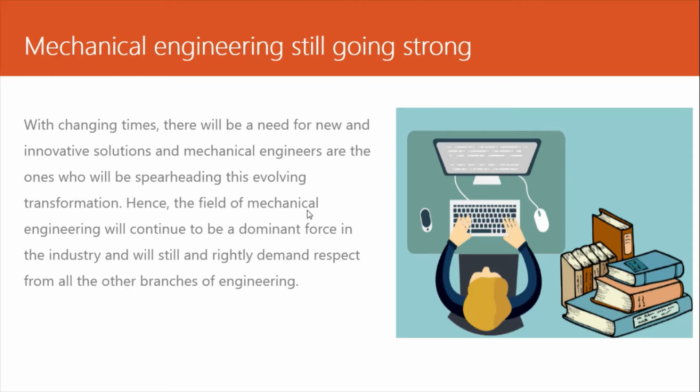Like if software is from civil industry, the developers of that software will largely be from civil industry, because to develop these softwares, fundamental engineering knowledge is required, and that fundamental is had only by engineers from that particular branch. So it is not that software engineering or computer science is good and mechanical is lagging - it's always good, but mechanical engineering is not lagging. It is still strong and it will be strong. It is a dominant stream in engineering.

So what are the things which can be expected from future mechanical engineers? These are mainly a few promising areas for the future. I have listed 7 segments from mechanical engineering where demand will be higher for mechanical engineers in these sectors.

So first is electric vehicles. Obviously, in the world, momentum is gained by electrical vehicles. The whole world, developed countries like European countries or US, have already gained momentum on electric vehicles. Countries like ours are still in developing segment, gaining momentum at a slow pace, but definitely there will be huge demand in electrical vehicles in future because government has changed the policies.

It is incentivized by the government. There are a lot of subsidies on electric vehicles because government also wants to minimize dependency on diesel or petrol, since ultimately it is going to save money. So electric vehicles are in demand currently, and obviously there will be huge demand for them. Whatever technologies related to electric vehicles will be in demand - design, manufacturing, or interdisciplinary skills.

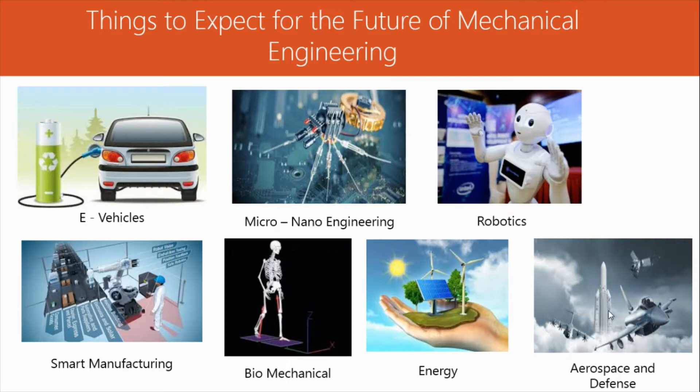So I am going to discuss this from the upcoming slides. I have discussed which areas will have demand for mechanical engineers. Now, where do mechanical engineers actually stand in these sectors? I have broadly mentioned three sectors.

One is CAD and CAE - CAD means computer aided design and CAE means computer aided engineering. CAD CAE is basically a research and development related profile. Then comes manufacturing, the second skill set or area. If you go to produce anything, manufacturing technology will be required.

There are a lot of softwares related to manufacturing. There will be some design of manufacturing processes - this kind of skill will be required, along with Six Sigma or some cost-saving and time-saving techniques required in the manufacturing field.

And lastly, most of the time I like startups. So mechanical engineers can think of starting an entrepreneurship journey in these sectors or any other sectors. Apart from these core mechanical sectors, I recommend mechanical engineers also go through interdisciplinary skills.

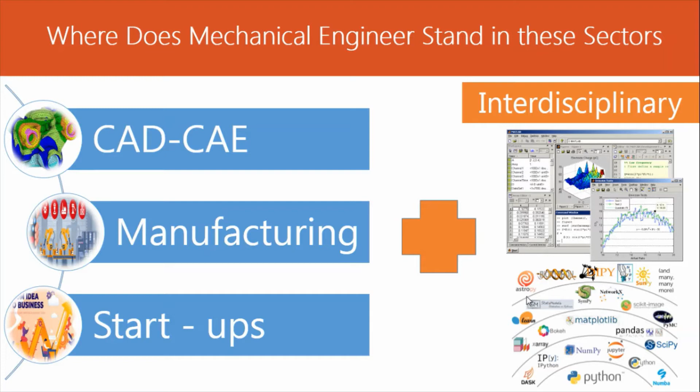I will come to this part later. So basically remember: CAD, CAE, manufacturing, startups, plus interdisciplinary skills. Now I will start with CAD and CAE.

CAD and CAE are basically a core part of mechanical engineering. All the profiles related to research and development or design fall under CAD and CAE. If you look at core mechanical engineering, it is divided into two parts - one is R&D and one is manufacturing. R&D is like the soft part, manufacturing is the hard part.

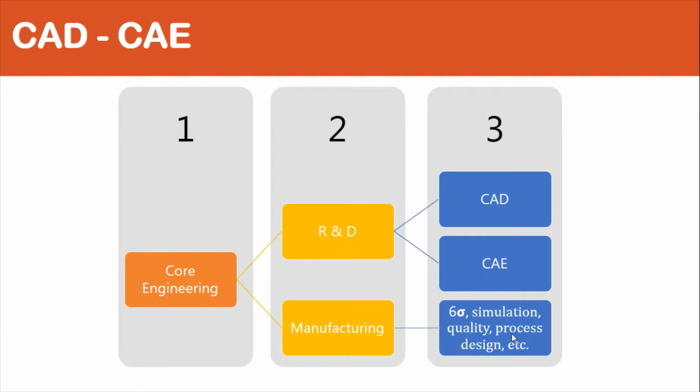So in R&D there is CAD and CAE. In manufacturing you can see Six Sigma, simulation of manufacturing processes, quality control, process design, and all other segments in manufacturing. Let's go further.

So CAD and CAE - out of that, CAD is computer aided design, basically to digitally create a real world product before manufacturing. So if you decide to manufacture any product, there will be a design process for that product - some calculation, design calculation, and a concept of that product.

Even in CAD there are multiple profiles for CAD engineers. In industry, people who work on this kind of job are mainly called CAD engineers. So in CAD there are these many verticals.

One is system design, one is sheet metal design, one is BIW design, jig fixture design, tool die mold design, product design. So system design means - if you take a car as one system, a car has a number of subsystems.

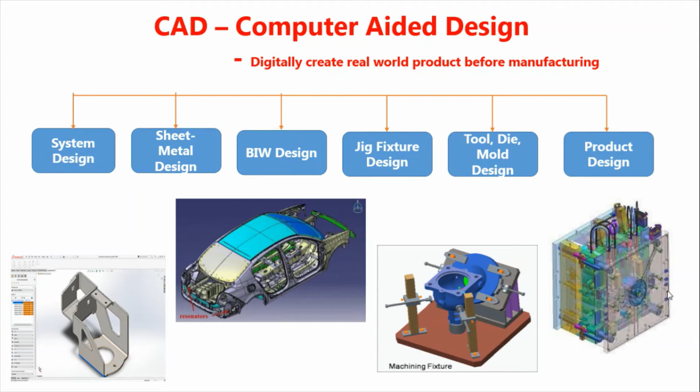And product design - product design involves many things, starting from concept, understanding the market, what is the need of a user friendly product. Then there is aesthetics about the product, usability of that product. Then ergonomics related to the product - ergonomics means how the user can handle this product without any fatigue or trouble, so that the product is easy to use. So this is involved in product design.

There is one called CATIA, from Dassault Systemes. Then there is SolidWorks, also from Dassault Systemes. CATIA is famous in the aerospace industry because aerospace requires surface modeling features, and CATIA is very good in surface modeling. Then SolidWorks - you can say this is a top candidate in the industry.

SolidWorks is a very good software, my favorite software. It can handle large amounts of assemblies effectively. It is widely used in machining industries, automotive industries, even every industry.

Then there is Creo Parametric - it is also well-known software, a very famous CAD software, from PTC company, PTC Creo. Then Siemens Unigraphics, from Siemens company. Then Solid Edge, also from Siemens. Then Autodesk Inventor. So these are the top CAD softwares.

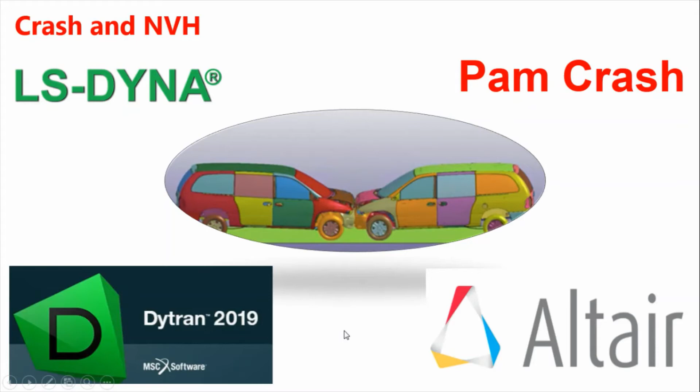Then there is PAM-Crash, which is specific to crash analysis. Then Altair also has a crash analysis segment. Then there is Dytran from MSC Software. But basically LS-DYNA is the most popular, so you can start with LS-DYNA if you have interest in this kind of analysis.

Then I will compare CAD and CAE. In CAD, you design or model the digital design of the object, and in CAE you analyze the design of that object. If you see in the CAD sector, a large number of jobs are available - CAD engineers are required in small industry, medium industry and large industry. Every industry will require CAD engineers.

Then CAE - relatively fewer jobs are available. Mainly very large companies use CAE softwares, and companies which are suppliers below the OEMs or very large companies use CAE. In small industry you will not find CAE softwares, though there are some companies which provide CAE services.

CAD requires minimum skill. CAD engineers mainly require software related skills, while CAE requires very high fundamental knowledge of that domain.

If you want to work in FEA, you should have sound knowledge of mechanics, strength of material, machine design. If you want to work in CFD, you should have good knowledge of fluid mechanics, heat and mass transfer. Or if you want to work on multi-body dynamics, you should have good knowledge of vibrations, theory of machines, mechanics, mechanical mechanism analysis, and similar subjects.

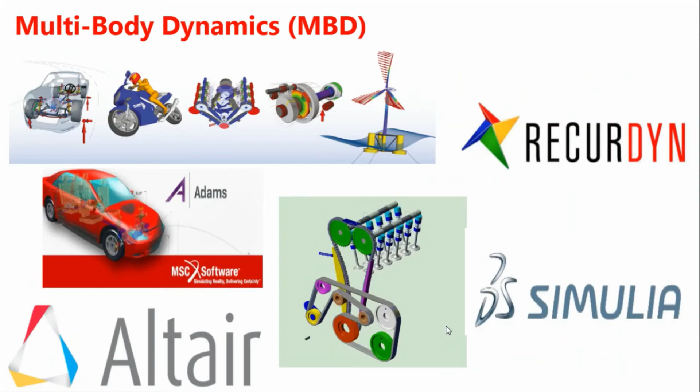So I have talked about many softwares. Basically, I have talked about what are the industry used softwares. I have not mentioned all the softwares - there are a lot of softwares, but my focus was only on what are the industry used softwares. So you can choose your area of interest and start learning from these tools.

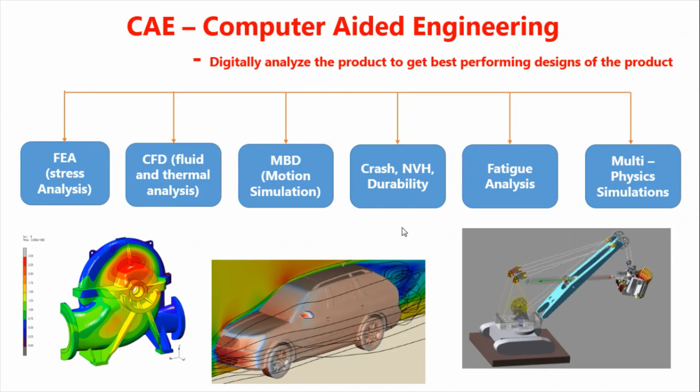Thanks for your time, I hope you liked this talk. Mainly I wanted to share what are the main softwares used by the industry. If you want any specific related knowledge, let's say FEA or MBD, I can deliver that specific to the area. But this talk was very general - I just wanted to make you aware of what are the industry skills required and where actually you stand in your curriculum. Most of the time your curriculum is not aligned with industrial requirement. So whatever curriculum is there, it is okay to do it for passing, but remember to learn the skills.

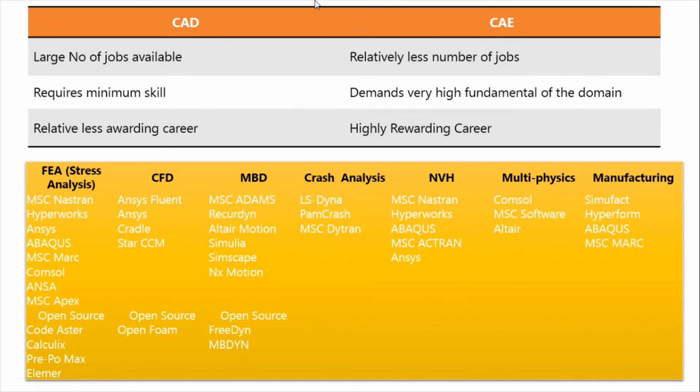Without skill there is nothing. Even if you say I have money, I can start the business, but to run the business it does require skills - financial skills, technical skills. So industry has become skill specific. You might have heard news in the last month about a K-shaped type of economic recovery this year. This K-shaped type of economic recovery talks about sustaining of professionals - those people will sustain in this kind of time who have professional skills or the right skills.

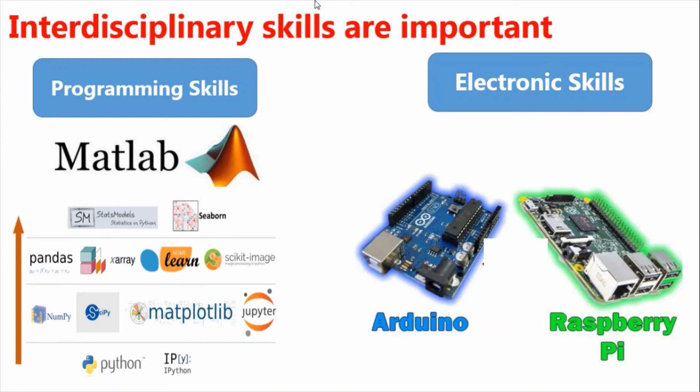You can think about this whole talk, choose your area of interest, and start your learning journey. Learning should not stop - even I have 6-7 years of experience, I still learn new things from other areas. Like I already talked about Python - it's a programming language. I'm a mechanical engineer, still I learn Python language, and it is necessary. Knowledge doesn't go waste, it will help you one day. If you learn something today, it may not help you immediately, but definitely it is going to help you someday in your life. Knowledge is like a sword - it definitely doesn't go waste. So keep learning, keep acquiring new skills, and thank you for listening to me. Thank you and have a nice time.